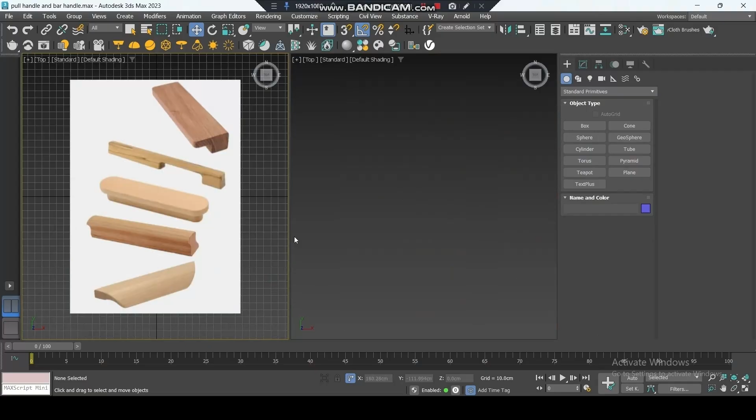First, I will start with this rectangular shape. I will draw here in the top view a box, and I will make this box 20 by 2 by 2. Now for this box, I need to divide the height into 4 segments, which means each part is half a centimeter. So I will make the height segments 4.

Now I need to add edit poly and extrude this polygon outward 1.7. Now I will need to make these corners round, so I will chamfer these edges.

I also need to chamfer the other corners, but this one should have a bigger amount. So I will start with this one, and I will make the chamfer 0.5, and I will give it 2 segments like this.

Now I will add more chamfer for this edge and this edge, and also I will pick this edge and this corner. Now I will chamfer them, and I will make this time the chamfer amount 0.2. I will keep it 2 segments, no problem.

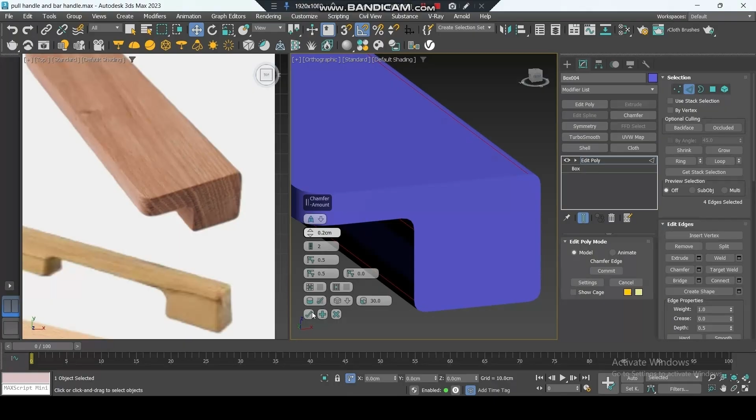So this is my first handle, and now I will start with the second handle over here. I will draw now a box, and this box is 25, the width 1.5, and the height 2.5.

Now this box I need to divide with some segments, so I will extrude in this part of the handle. So I will add here in the length segment 5.

Now I will add edit poly. Each part is 5 centimeters. I will just need to move this edge inward, -2. Okay, so this becomes 7 centimeters.

I will also give it some space from the back side. Also, I will give it 2 centimeters.

Now I will select this polygon over here, and I will use Shift to extrude it in, and check the status bar to give it a 1.5.

Now I will need to curve this corner over here and over here like in the picture. So I will select the edge mode, and I will select this edge and this one, then press F3, and I will select this one. It will help me see all the edges.

Now I will chamfer this one 0.5, and I will give it 2 segments. I will press F3 so you can see that in shaded mode. Now I did these edges alone because they have a bigger chamfer corner.

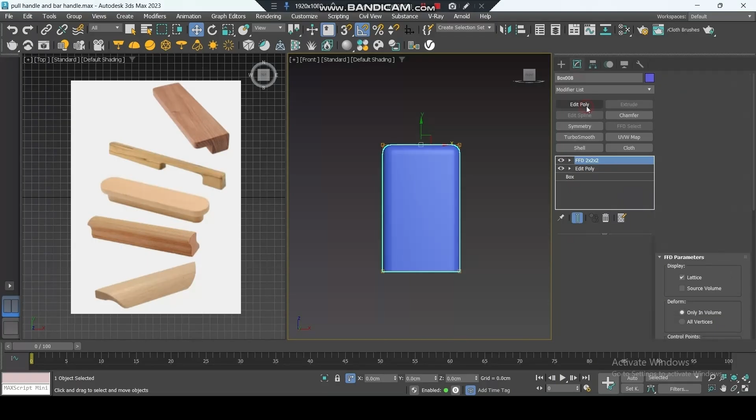Now I will go to the front view, and here this part is smaller than the bottom, so I will add here FFD 2 by 2 by 2. Select these control points, and scale a little bit inward, 75% or 70 will be good.

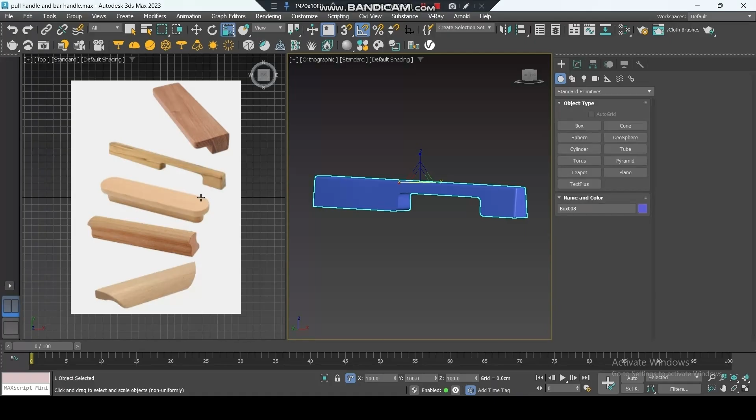So this is my handle, and now I will start with the third one, which is the rectangle with curved corners. So here I will draw in the top view. I will draw a rectangle, and this rectangle needs to be 30, and the width 5.5.

Now I need to use this option, which is corner radius. I will make it 2.5. Now I will extrude 1.2.

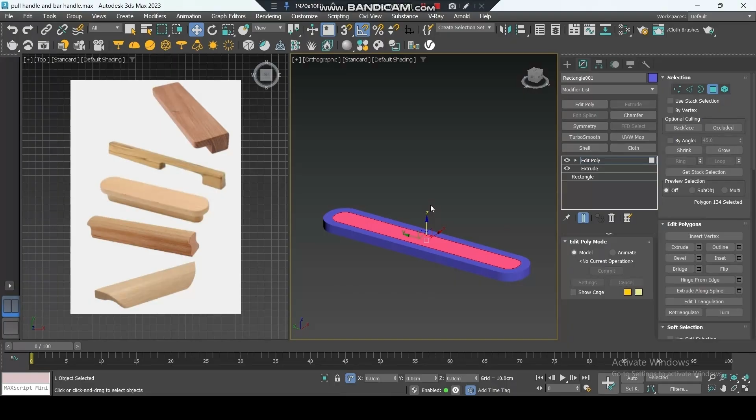Now I need just to add edit poly, select this polygon, inset inside 1.2, and then I need to push it upward or extrude it upward. It will be 2.5.

Now I will give the whole object a chamfer modifier, and I will start with an amount 0.2. Now I can see that everything is okay, no overlapping polygons, so I will add here also 2 segments, and I will make it smooth chamfers only.

Now I will flip this object using mirror in the Z axis and press OK. So this is my third handle.

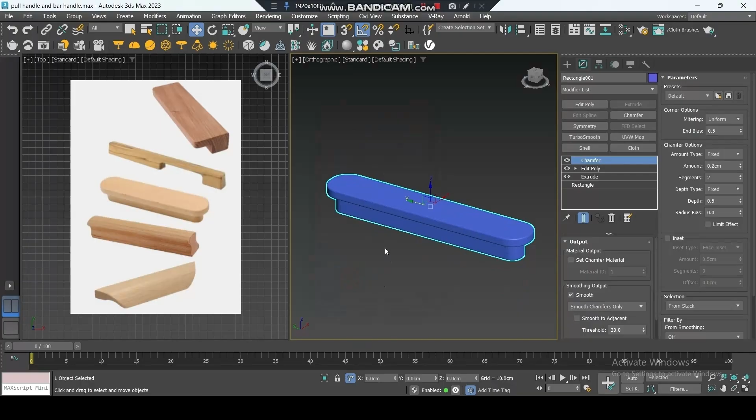Now I am going to start with the fourth one, which is this one over here. Here I will draw a box. I want this box to be 15 by 4 by 3. Now for the segments, I want the length 1 with 2 segments and the height 2.

Now I need as well to add edit poly. For this small corner over here and downward, I need to double click this edge loop, and I will chamfer. I will make the amount 1.

Now I will select this edge and move it upward 1 cm. Now I will select this loop and scale it in the Z-axis 50%. Check the status bar for the value until you reach 50%, and I will stop.

Now I have the basic shape for this handle. I just need to loop the edges before I add Turbo Smooth. I will press Alt plus 1, and add one loop here and one loop here. Now I need to add Turbo Smooth, and we will make the other changes.

Now I can adjust this curve a little. I will close Turbo Smooth, select this edge by double click, and chamfer it, like 0.8 or so, to improve the curve here, and give it 2 segments as well.

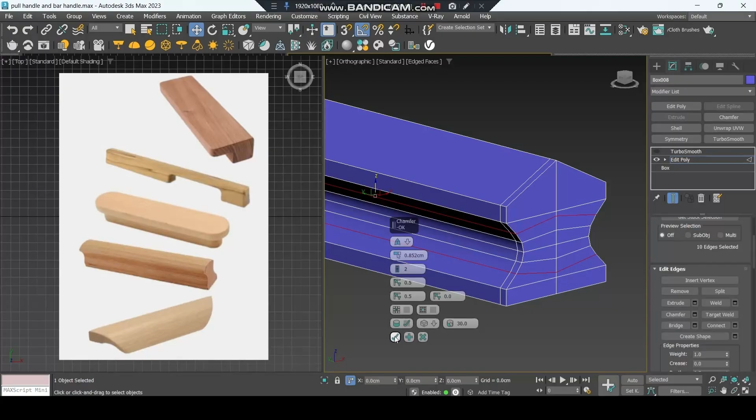Now I need to straighten this base polygon, so I will close Turbo Smooth, select this polygon using By Angle, and convert the selection to edge mode using Shift.

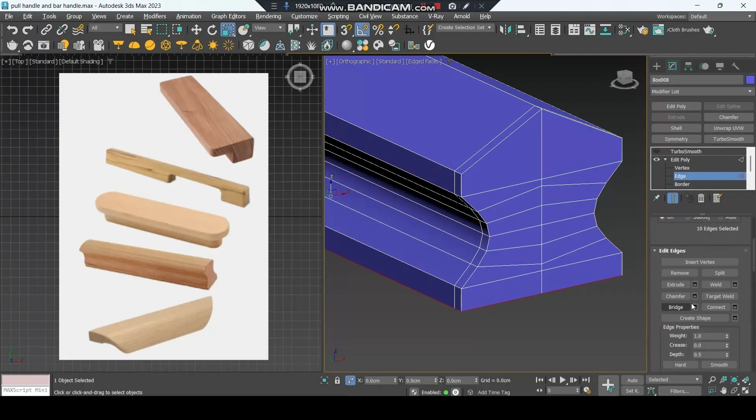I will chamfer it just a small amount like 0.01, with only 1 default segment. Now I will turn on Turbo Smooth. So this is the fourth handle.

Now I will start with the last one, the finger pull handle. Here I need to draw a line and then curve it downward, so I will draw that from a rectangle, giving it a dimension of 2 and width of 4.

From this rectangle I will add edit spline. Here I will draw the profile for this handle, a line, and curve this corner downward. First I will delete these 2 segments, select this point, fillet it to the maximum, and weld the end points together into 1 point.

Now I will make an outline for this spline, making this outline 1.4. I need to fix these points, and I will also select these 2 points and fillet them 0.3.

Now I need to give it a curve so it goes downward like this, up and then down a little. So first I will add one point here, then move this one backward.

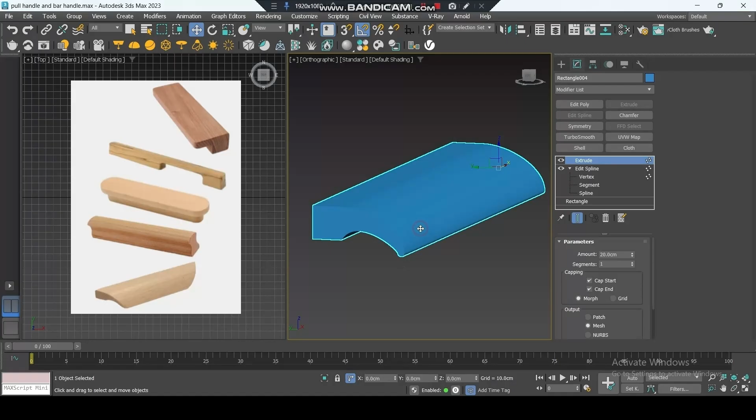I will change the color so you can observe it better, and this is the handle. Now I need to go to the top view. Here these sides are straight, and here they are curved inward.

So I just need to add FFD 2 by 2 by 2, then select both control points and scale them inward like this. So now this is my handle.

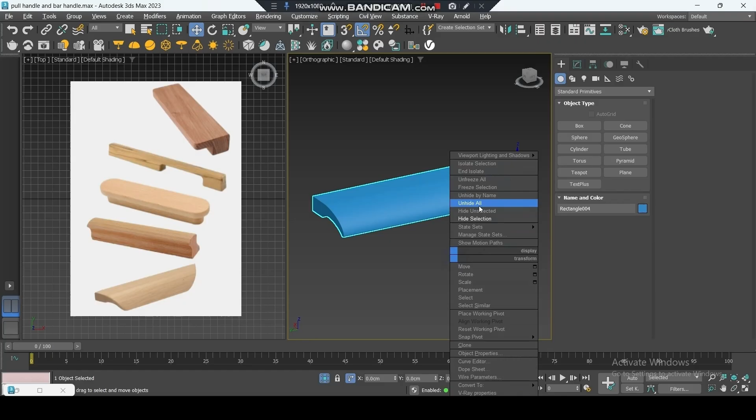Now I will unhide all, so this is the whole group. Now I will just match it with the same color. Now I am going to add a material to them.

I will pick from the V-Ray toolbar this V-Ray material library, and use from this list wood and laminate. You just need to pick any pattern that doesn't have floor divisions. I have here something called veneer, so I will choose this kind of material.

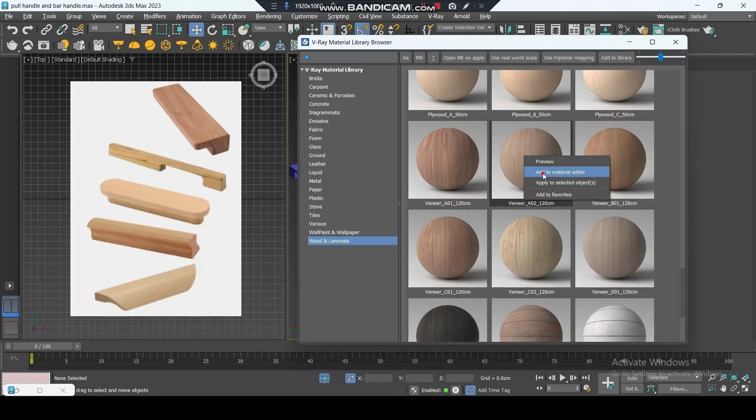I will right click, add to material editor, and this is my material. I will read here that this veneer has 120 cm, so I need to put this size here downward, use real world scale, with the size 120 by 120.

Now I will do the same for the reflection: use real world scale, 120 by 120, and also the same for the bump. So for any material including any map, you need to give it the same size, 120 by 120.

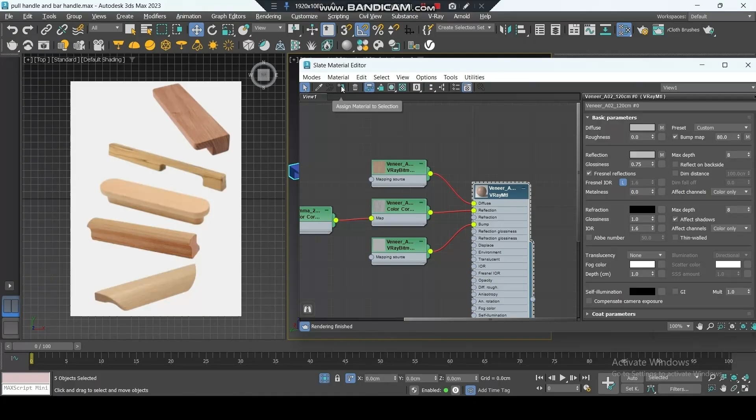Now I will close this one. Now I will select my objects and click on this material. Here you want to assign the material to the selection like this, and make sure that show shaded material is active. Now I need to go and open the modifier list and add a UVW map modifier.

Here I will use the type box, use real world map size, and then I need this texture to go along, like in the picture, along this handle. So I will use here this axis, the Y axis, like this. Now they are running along this handle.

So this is the final look for my handles, and we are done.